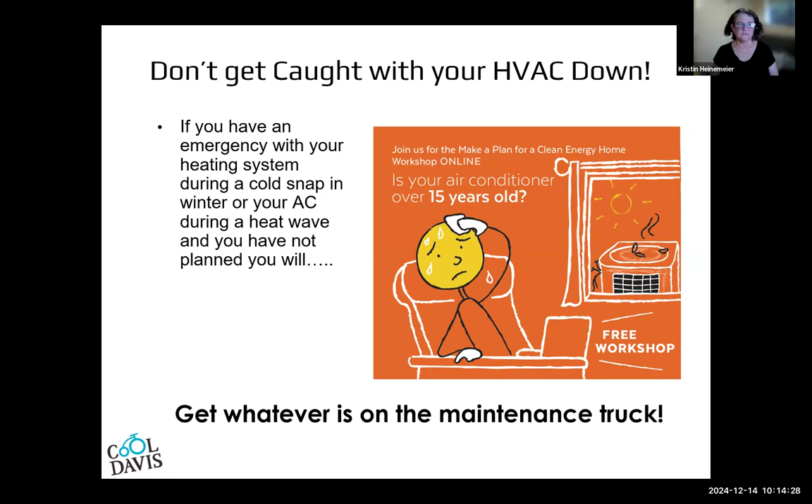So that's really the motivation behind making a plan. And so the question you've got to ask yourself is, do you feel lucky? Do you think your system's going to last a bit longer? How confident are you of that? One of the ways to assess whether you're going to be lucky is, how old is your system?

If it's a pretty new system and it seems to be working okay, then your plan for that will be quite a few years out. But if it's an older system, you might need to start looking at it. Many people don't know how old their system is, so one of the things Cool Davis offers is we can generate a report of all the permits that your home has ever had - it'll tell you what kind of permit it was and who the contractor was.

So you've got your report, you know how old your systems are. Now you want to start thinking about what do I do? Where do you start? Do some energy sleuthing.

This is Chrissy Backman, one of our original energy consultants or coordinators for Cool Davis. She's checking out her meter. This is kind of an old school way of checking your energy use. It can be useful. Some meters now, I'm not sure you even have access to that, but that's one option. Another thing is to check out a watt meter from the library, or Cool Davis has watt meters you can borrow.

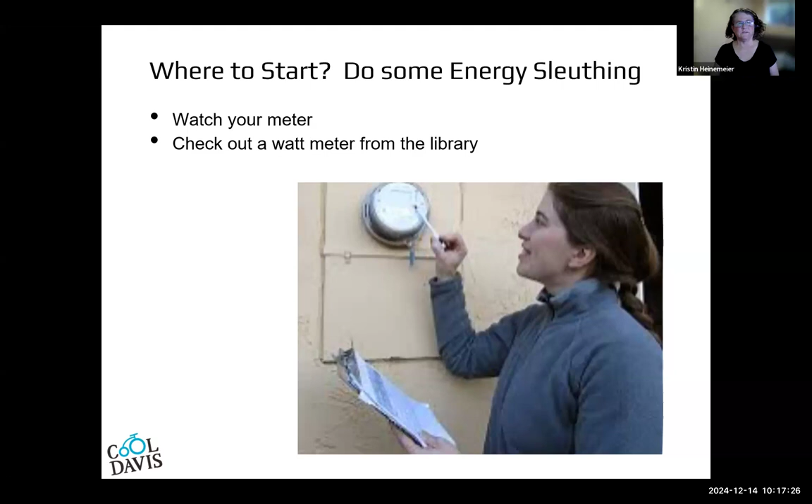My other son used it to check in on his roommates, because the energy bills seemed really high. He went into their rooms and checked out their computers, and some of them had a space heater, so he could tell them, aha, I want you to change your ways. It's a really helpful thing, often having that watt meter.

Another thing Chrissy did, maybe a little more up to date, is she downloaded a copy of all her energy use. Anyone can do this. If you have a PG&E account, you click on 'my energy use' or something like that, and you'll see something that looks like this green button here. Most people around the country have access to this. It's a really handy way of getting quick access, and if you're handy with a spreadsheet, you can graph it and see what's going on.

What Chrissy found was that every weekend her energy use was high, and she thought, oh my God, I've got to do something about this. She said, my kids are home on the weekends, they're using their gaming systems, that's the culprit. I'm going to tell them to change their ways and we're going to fix this problem.

So this was her old data, and this is when she started looking at it and found out there was this weekly problem. She told her kids they couldn't use their systems on the weekend, we're going to cut that out. But it didn't reduce it by very much, so she had to keep looking to see what it was.

Lo and behold, she found it was her laundry—Sunday is laundry day. Washing machines use a fair amount of energy, but electric dryers use a ton of energy. So one of the things she did was start line drying her laundry, and there's a video on line drying laundry you can check out.

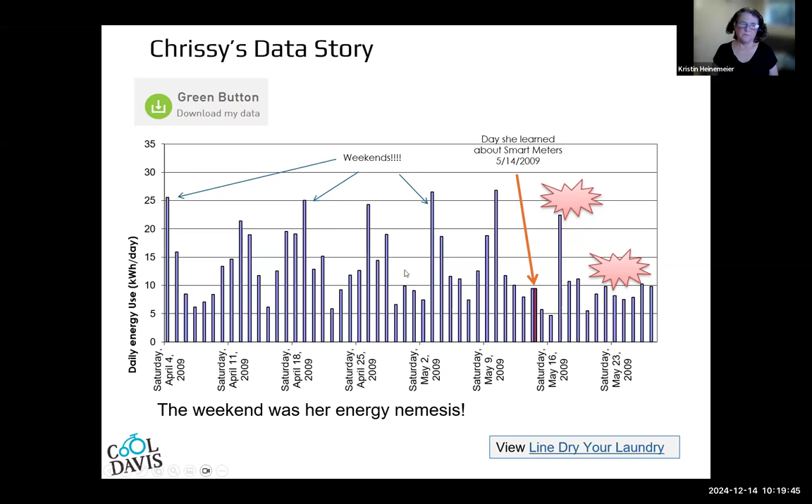So kind of play with it—you can get a sense of where you're using energy by looking at that data. There are also online resources from PG&E and Valley Clean Energy you can take a look at.

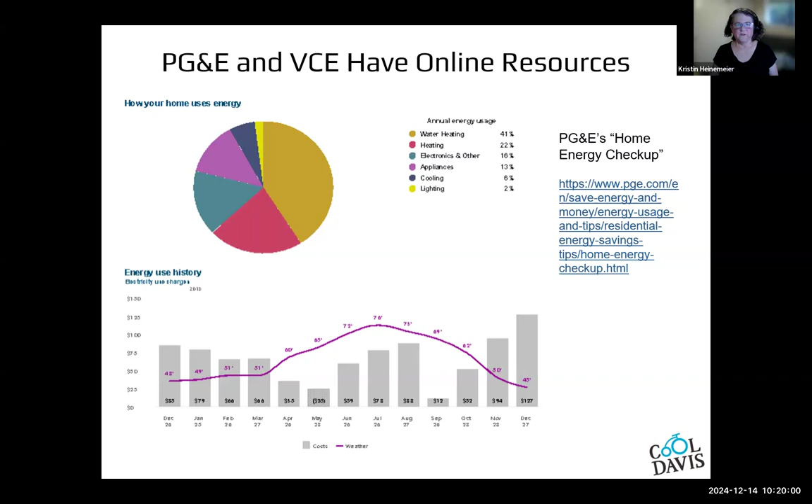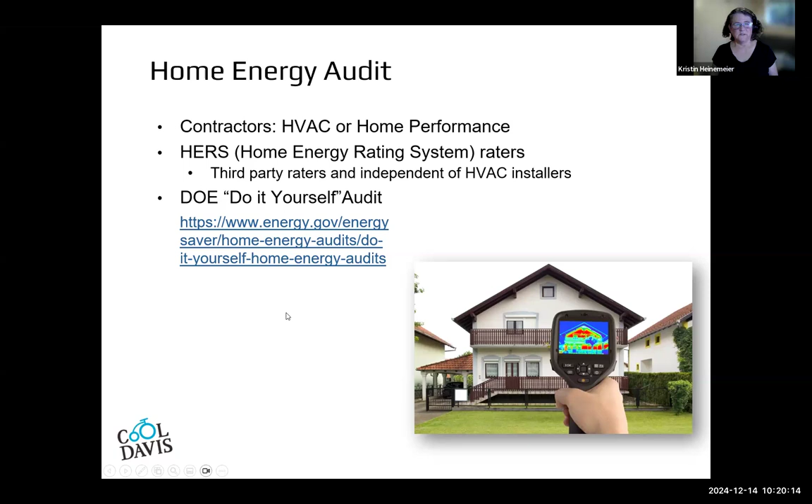Valley Clean Energy has hotlines and advice lines that can help you figure things out, so check those out. Get a home energy audit. Many contractors, HVAC contractors or home performance contractors can provide an audit for you. The DOE has a do-it-yourself audit, so check that out.

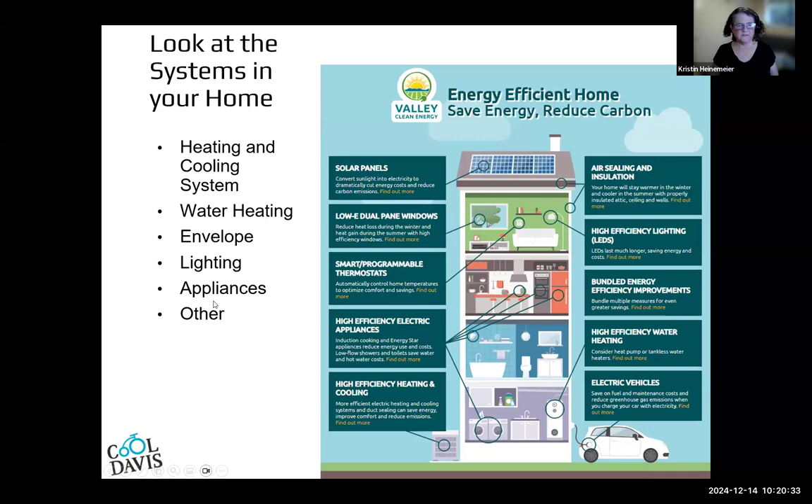There are a lot of different ways of getting information about the energy use in your home. Start looking at the different systems, and Valley Clean Energy has great resources linked on their website. Look at your heating and cooling system, water heating, envelope, lighting, and appliances. I'll talk about all of that. Cool Davis has an Understanding My Home Energy worksheet you can download to help you methodically look at all of this.

So where do you start? Now that you know what end uses might need attention, the way we always told people to do it in the past was this inverted pyramid: you start with behavior, reducing all your loads, getting things as small as possible, then you're able to right-size your HVAC system to make it as small as possible. Once everything is as low as possible, then you put PV on your home, and that rooftop solar system will be as small as it can possibly be and least expensive. That makes all kinds of sense.

But in the real world, sometimes you'll find there's a great deal on solar. That's what happened with me. There was a 0 interest loan available, and I said, hey, this is a great time to do solar. I hadn't done some of the other stuff, but I talked to my solar contractor and said, I'm planning on replacing my windows pretty soon, so take that into account. My HVAC system will need to be replaced at some point too, so you can kind of anticipate some of these things.

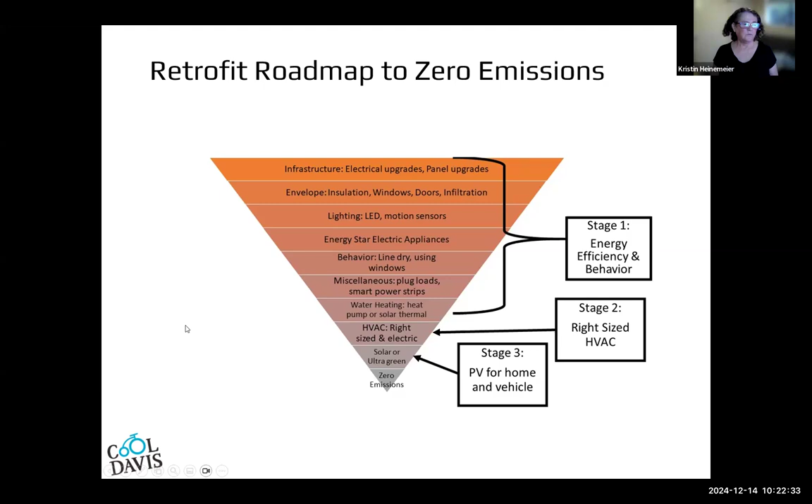You don't have to necessarily do it in this order, but that's what making a plan is all about. If you tell your solar contractor you're going to put in an EV charger and a heat pump, they'll have to make the system a little bit bigger, even though you haven't installed those yet. However you want to phase these things in, making a plan will help you make sure things can be as small as possible.

Appliances and lighting are always a good place to start. Look at all the end uses in your home and see which ones you can replace. Replace all your light bulbs with LEDs—there's no reason not to do that right now, LEDs are great. Look at some of your other appliances too; maybe they're not needing replacement yet, but they could be replaced sometime soon.

Water heating is a big one. This is another end use where if it fails, you are out of luck. It's very unpleasant when your water heater goes out and you find the one you really want has a lead time of a month. You're not going to wait a month—you're just going to take whatever you can get. So consider early replacement on water heating, particularly.

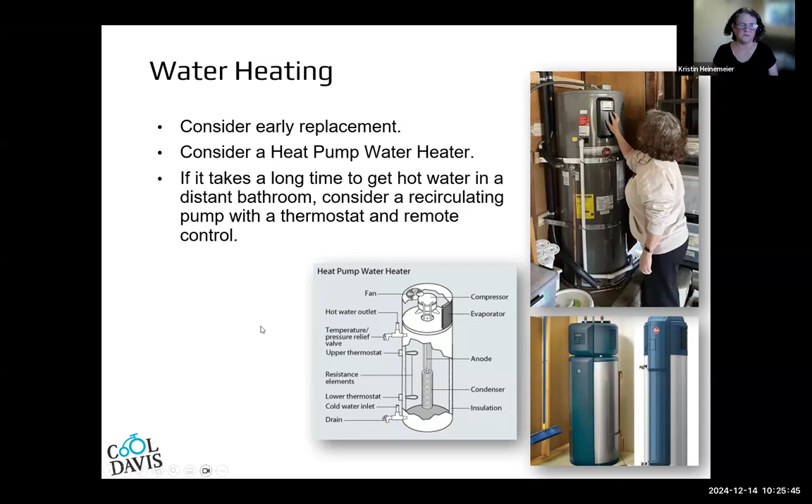The envelope of your home is another great place to look at. That's basically the whole shell of your home—the roof, the ceilings, the walls, the floor—any place where air or heat could be leaking in or out. You want to pay attention to that.

Sealing air leaks is a great place to start. You can take an incense stick and go around your windows, doors, and outlets, seeing if anywhere air is going in or out—that tells you you're leaking a lot of energy into the atmosphere. Or you can call a contractor and they'll do something called a blower door test, where they pressurize your whole house, making it really easy to see where those leaks are.

Wall insulation is one of those things that's really hard to address once your home has been built. There are times, like if you're replacing windows, that might be a good time to remove some siding and address the insulation, but it's kind of tough.

Attic insulation is something you can address because it's right up there in the attic. Poke your head up there and see what it looks like—you should have a good amount of insulation, pretty evenly distributed. If possible, you can bury your ductwork to make it even more cozy in your house. But attic insulation is definitely worth paying attention to.

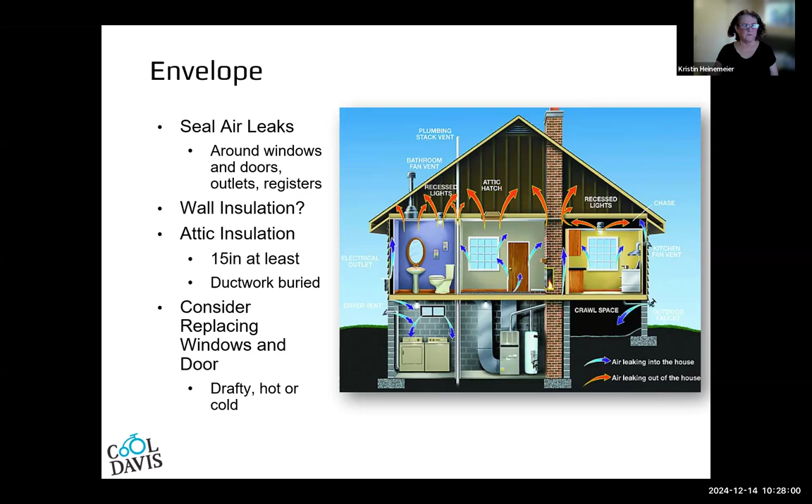There are cool coils in the air handling unit, cooling off air. The air goes through these ducts throughout the house, then the hot air goes back into the air handling unit. It's all recycled. Many people aren't aware that you're not getting any fresh air. Most homes have enough leaks so you're not going to suffocate, but a normal air conditioning or heating system does not provide any fresh air. Just be aware of that.

So it's all going in a circle around and around, and the heat accumulates in the air handling unit, in the coils, and then it's pumped out through the condensing unit, or the compressor pumps all that heat out into the atmosphere. That's how most systems work.

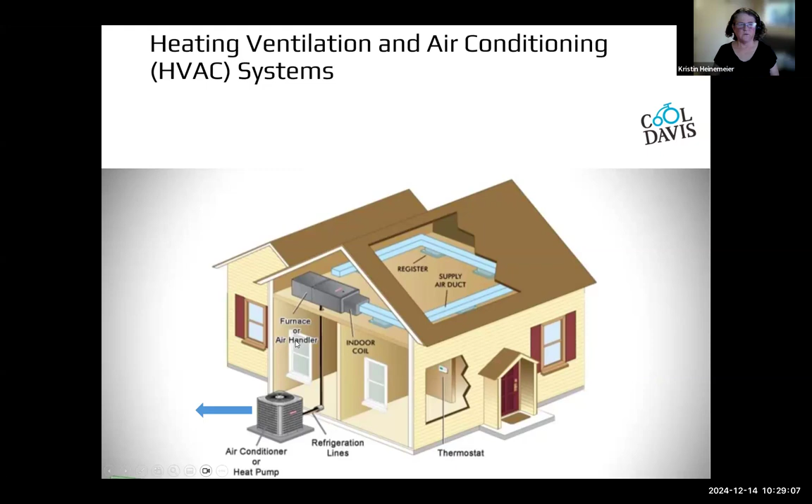So let's look at some of the components. Ductwork is something that really pays to look at closely. Most ducts really leak a lot—people are just amazed when they find out how much most ducts leak. And it's not that hard to address that.

I like to say it's like driving a Prius with a leaking fuel line. You can be all proud of yourself—you got this great, efficient car, but then you're just not getting the fuel economy you expected. Well, that's because it's all leaking away.

Anytime you're doing a repair or replacement on your HVAC system, talk to your contractor about addressing the ducts. My pastor had added a room onto his home and was going to have to get a whole system to condition that one room. But fortunately, he called a good contractor who looked closely at the ducts and said, if we fix the ducts in the rest of your house, you've got plenty of capacity. You don't need to add a new system or put in a bigger one. So sometimes just dealing with the ducts can be all you really need. That's kind of cool.

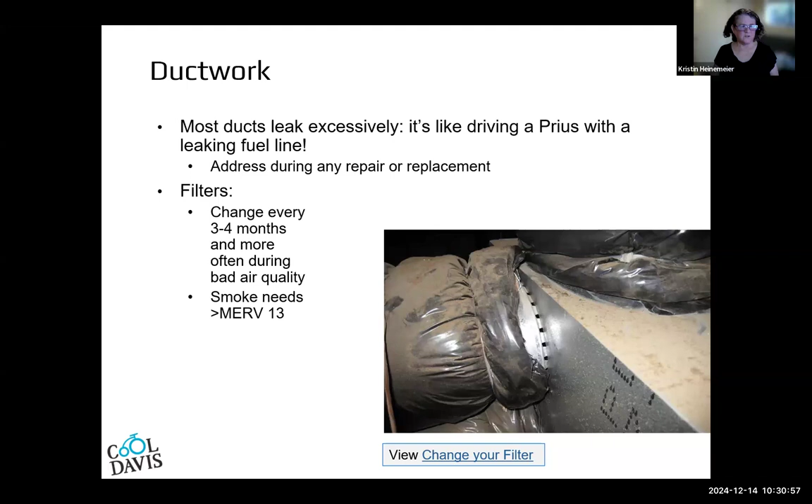Something you can do at any time is replace your filters. Replace them as often as needed. On really smoky days, you can temporarily put in a MERV 13 filter that filters out a lot of the smell of smoke. I find a MERV 13 is a little too constricting for everyday use, so I just put them in when it's real smoky. Play with it and see what works for you. We've got a video on how and when to change your filter.

I should probably start with this because it's one of the most important things people in Davis can do to reduce their energy bills. We are the luckiest people in the world because we have the delta breezes. If you look at the difference between day and nighttime temperature, that's one of the biggest differences of anywhere in the world. That's because the cool delta breeze comes off the ocean and flows into the valley right about where we are. Even on hot days, we can reliably count on cool nights.

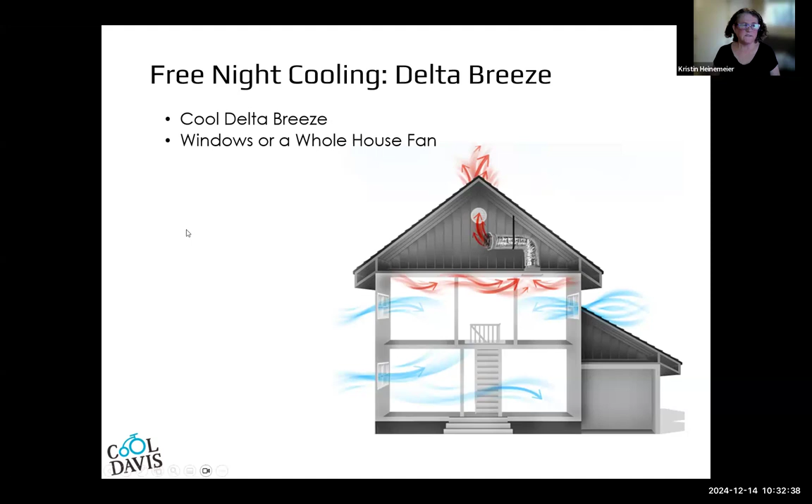You don't even really need a whole house fan. One thing I do is open my windows and put a box fan in one window going in, and one on the other side going out, so I picture this sort of wind tunnel going through my house. As soon as I wake up in the morning, I close everything off, and it's just a great solution. It doesn't have to be expensive. We've got a video on how to do that.

Look at your thermostat settings. One thing I really want to tell people is put your fan on auto, not on. Some people think, oh, I want fresh air, but remember, you're not getting fresh air with your system—the fan only recirculates air through the house, and you don't want to do that when it's not needed. So have it set on auto.

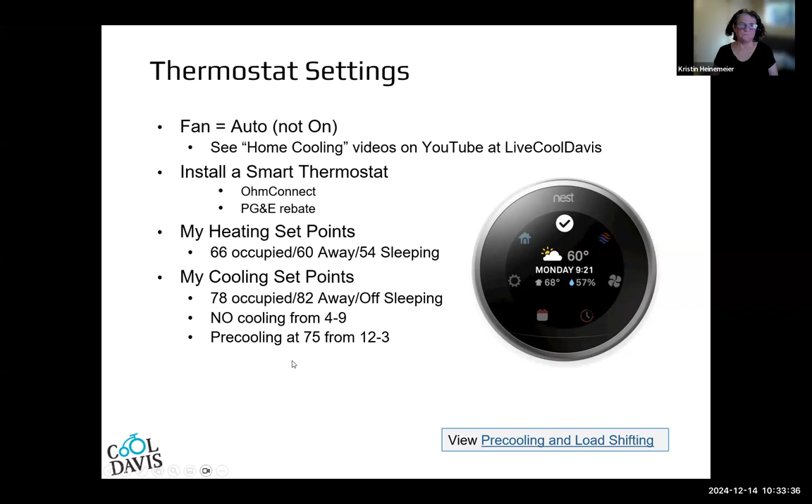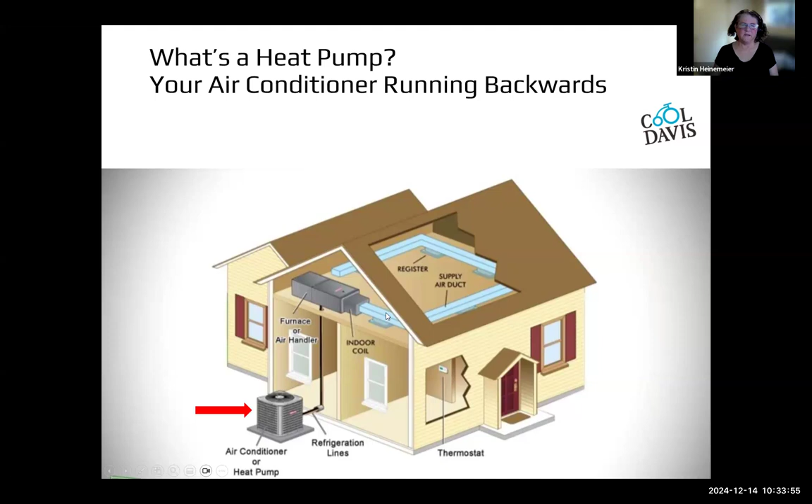The final thing I want to talk about is what a heat pump is. A heat pump is essentially your air conditioner running backwards—we pump the heat out of the house. Well, we can do the same thing in reverse and pump the heat into the house. Just as simple as it sounds: you run your air conditioner backwards. How does that work? It's kind of like water—it wants to go from high to low. If you want water that's low to be high, you have to pump it up.

You have to take some energy to pump it up there. Same thing with heat. Heat always flows from hot to cold. That's just a law of physics. If you want it to go from cold to hot, you have to pump it, just like with water.

So what that means is in the summer, when you want heat to go from your house to the outside, it's not going to do that on its own because it's hot outside. So you have to pump it. And the same thing in the winter. You have to pump the heat if you want to gather it from outside and pump it to the inside. It's hard to believe when it's 0 degrees out, but there is some heat out there. So a heat pump can just pump it backwards.

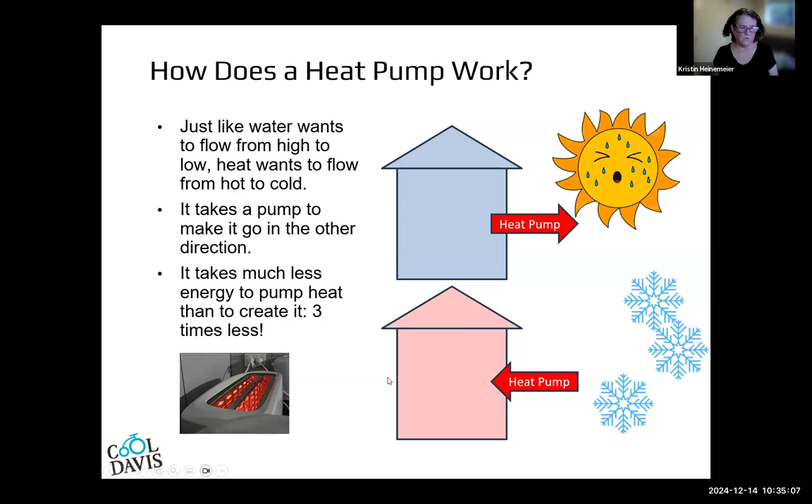It takes 3 times less energy to pump heat than it does to create it. Normally with a furnace, you've got something like a toaster here, an electric resistance, or you've got a burner where you're actually burning fossil fuels. So creating heat takes 3 times more energy than just pumping it.

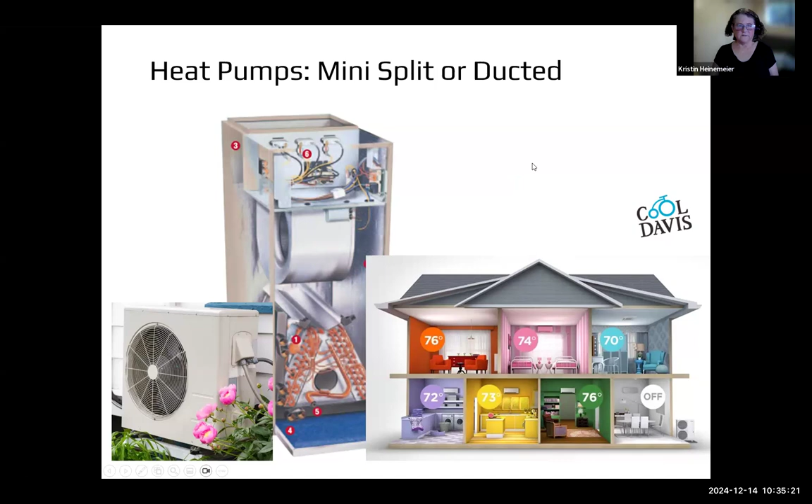A heat pump can be just like your air conditioner, a split system, or it could be something called a mini split, where every room can have a different temperature. It's kind of a neat solution.

I'm going to go through the rest of these a little bit quickly. So the first thing you want to do is work with a contractor. Find a good contractor that you're comfortable with now, and then you can start making your plan. Shop around, make sure it's someone that you're comfortable with.

When it does come time to select a bid, contractors aren't psychic. They can't tell what you want. You're going to have to tell them, I want something really efficient, I want a heat pump, whatever it is. Be sure that they know what you want.

Two things I want to say that I think are very specific: bigger is not better. If you have a really big system that's constantly turning on and off in order to not overheat or overcool you, that's very inefficient and very uncomfortable. Half the time you're uncomfortable. So a good contractor will do load calculations and make sure you're getting just the right size.

A good contractor also will get a permit. It's amazing how many contractors don't do that. That's required by law, and in order to do a lot of the things that are required, you really have to have a permit so that the city can be tracking what's going on. We have a working with contractors worksheet and a contractor bid comparison. So check those resources out.

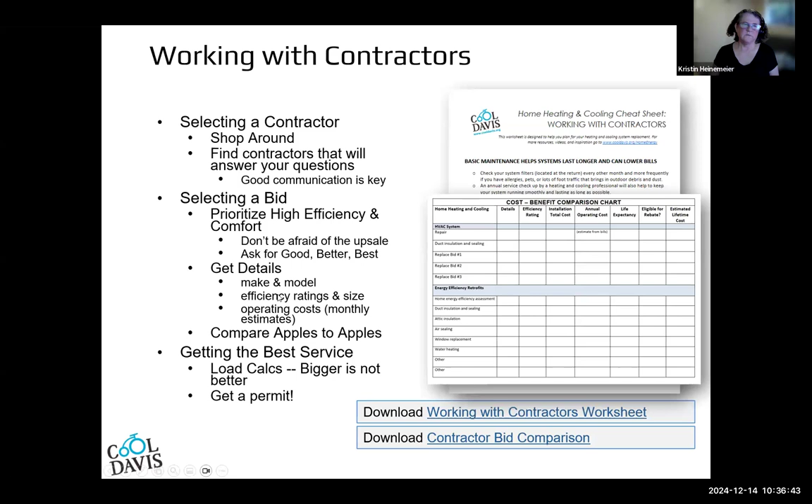Get the best price that you can. Contractors are constantly having sales and special deals where they'll bundle things in different ways. There's tax credits that come and go, rebates that come and go, and look into stacking, which means you can combine a lot of these things. Sometimes you worry, oh, if I take the tax credit, maybe I'm not eligible for that sale or rebate, but for the most part, you can stack those things.

Consider life cycle cost. If there's a sticker shock, things like solar or heat pumps sometimes can be pretty pricey, but they're going to pay for themselves over time for the most part. So consider, it might be more expensive to start, but it's going to save money over time. It might still be a really good deal, even if it seems pretty pricey.

Before I wrap up, I want to just say a couple of words about electrification, because I know that's a hot topic that a lot of people are thinking about. It basically means replacing combustion appliances with electric ones. Pretty simple. So look through your house, look for all of the combustion appliances - you've got furnace, water heater, dryer. All 3 of those can be replaced with a heat pump.

You're very, very efficient, totally electric end use. Your cooktop, I already talked about. Your car, didn't really mention, but you should certainly consider replacing your fuel-fired car with an EV, electric vehicle. These end uses can be much more efficient. They don't use fossil fuels. Electricity can be produced without burning fossil fuels.

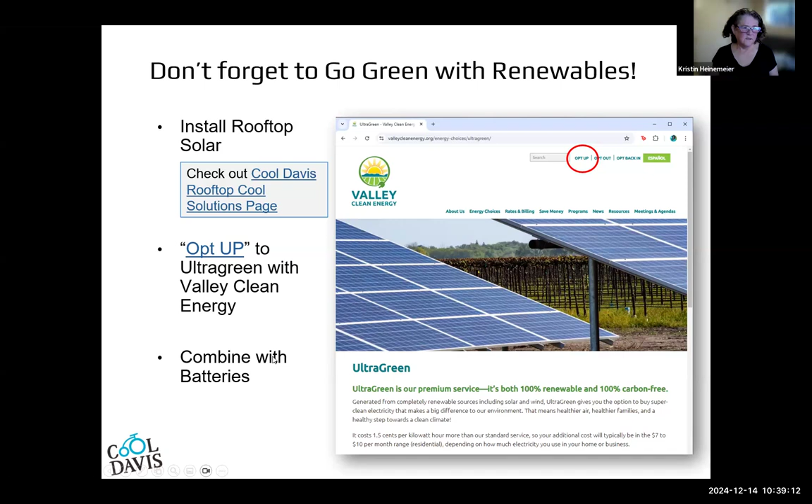A bit of a spoiler, I want to tell you that your next replacement will probably be electric. Even if you're not planning for it right now, just take my word for it. There's a lot of policy things, including Davis's Climate Action Adaptation Plan, that are leading towards electric. That is the way things are going in the future. And so I'm pretty confident that your next replacement will be electric. So you're going to have to plan for your electrical panel to have enough capacity to put all this. So yet again, making a plan is really, really critical.

So wrapping up, good luck on your clean home journey. It is a journey. You're going to be starting off in a panic, and then you're going to watch HGTV and say, oh, this is great. You know, this old house, I'm going to do this. Is going to be awesome. Then you have trouble finding a contractor, and you find one you're happy with, and then it's looking expensive, but then you find rebates. It's constantly up and down, but be confident that you're heading in the right direction.

You are on the right path, and talk to other people who are doing the same thing. And you're going to find that we're all in this together, and we can help each other through this. So good luck on that. And I will wrap it up there.

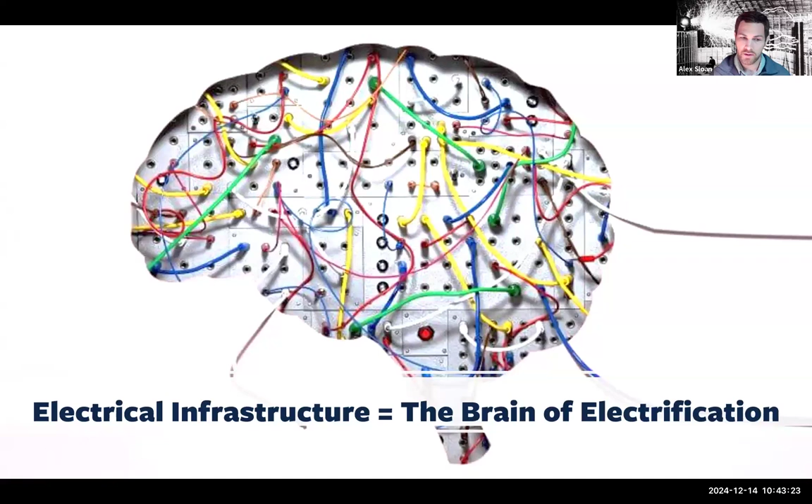So electrical infrastructure is the brain. Heat pumps are the heart of electrification.

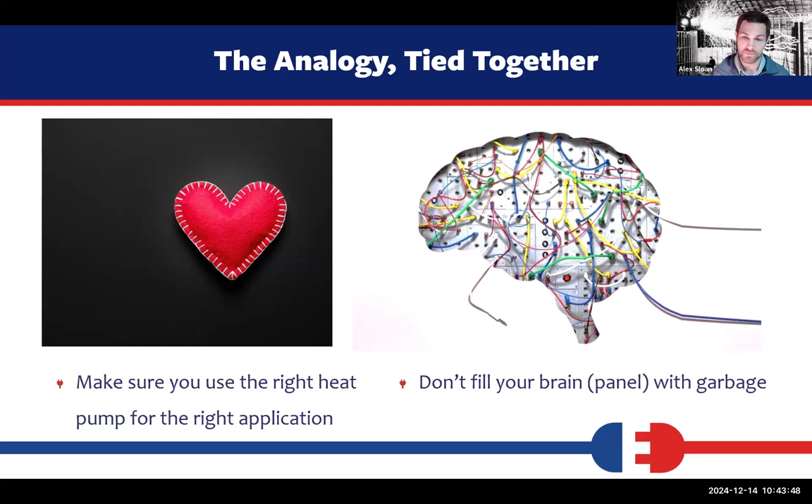We want to make sure the right heat pump is in your house for the right application, and do a load calc, all the things Kristin just mentioned. Also, we don't want to fill our brains with garbage, so we don't want to load a whole bunch of circuits into our panels that are unnecessary. That's where making this plan all starts.

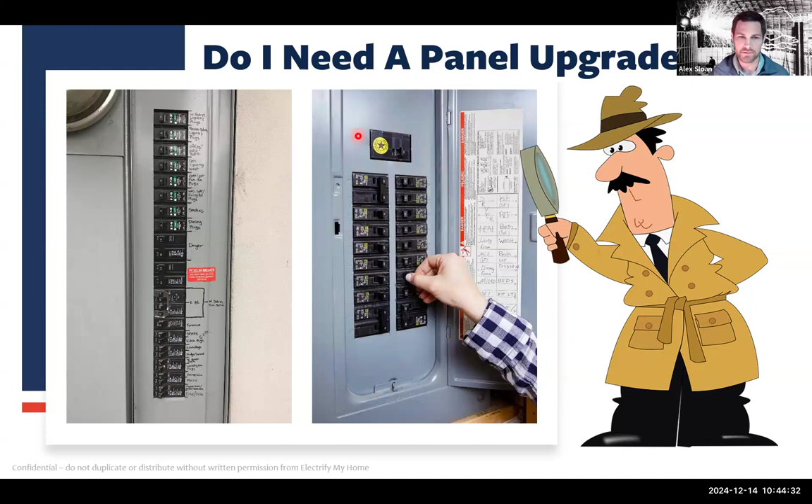A question we get from so many customers: do I need a panel upgrade? Most of the time it's very much an 'it depends' question. It depends how many gas appliances you have left in your house, what your main panel capacity is. There are a lot of questions that go into this. But if you pick a good partner, it's really easy to map out a journey. We're looking at pictures of two electrical panels here, and they look pretty darn full, but having no breaker space left is very different than having no electrical capacity left at the top.

Which brings me to my next slide: a full panel is not the same as no remaining electrical capacity. A 100 amp panel has 24,000 watts; 200 amp has twice that amount. Where it gets tricky is that we need to meet National Electrical Code guidelines, so this isn't always all available all the time. We need to be very conservative with our calculations. But trust us when we say there's a whole bunch of capacity out there, even on small 100 amp panels.

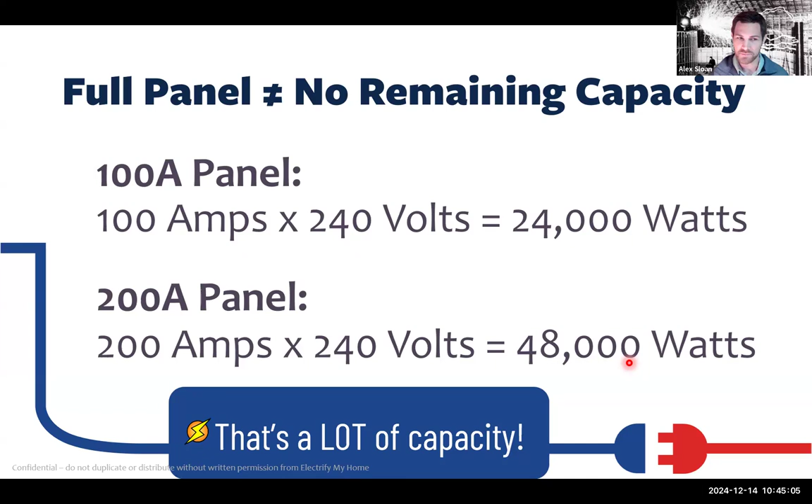So why are we talking about this? What's wrong with just going through and upgrading your panel? A couple notes here, and I'll take a quick aside: we have a whole 1.5 to 2 hour webinar on this particular subject, so I'm kind of cramming a lot of information in here. Feel free to add any questions to the Q&A or contact me after. We're happy to clarify.

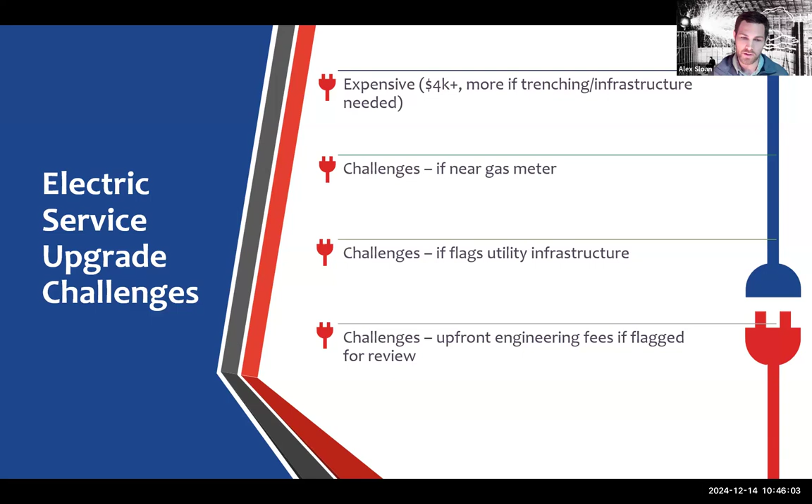Electrical service panel upgrade challenges: they're very expensive. It gets very complicated if you need to trench or add extra infrastructure from the utility. If your electrical panel is near a gas meter, utilities don't like that, and we can flag utility infrastructure and upfront engineering fees if it's flagged for review. So if the utility needs to upgrade a transformer on your block because you're the last one to upgrade to 200 amps, that burden could lie on you as a customer. We want to try to help you avoid that if possible.

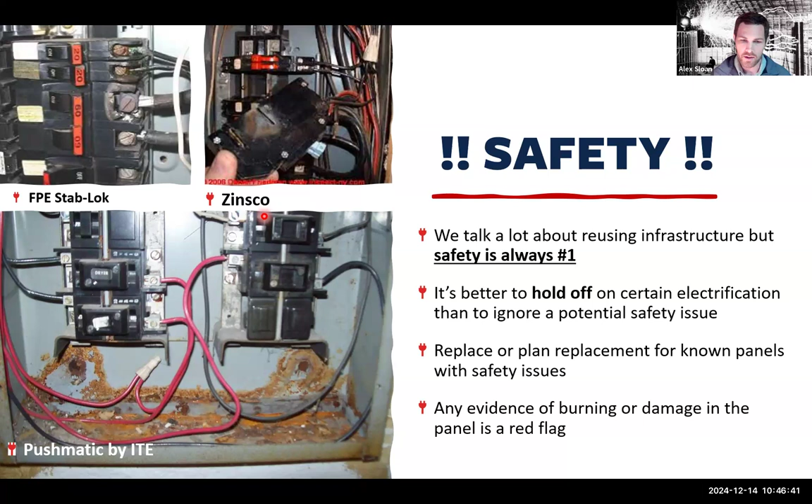One caveat to all this is that safety is always a priority. Sometimes going through and spending the money on a panel upgrade from the start is going to be really important, especially if we have an old and worn out panel type. Some of the notorious ones with potential safety concerns are listed on the screen here. We won't find a whole bunch of Stab-Lok and pushmatics in this area, but there are certainly a number of Zinscos. Zinsco panels can continue to operate, but we want to inspect them regularly to make sure there's no signs of burning or scarring or red flags.

Next, I'm going to talk about ways to stretch your panel capacity without having to upgrade your panel from the start, and then I'll show a quick case study at the end. We like to call this watt dieting. We have several different choices we can make with respect to the appliances we put in our home. The earlier in the process we can talk about and plan out your panel, the better. If you've already added your solar and almost all the appliances in your house, and then you want to add something, it's a little harder to plan for, but we still have some tricks.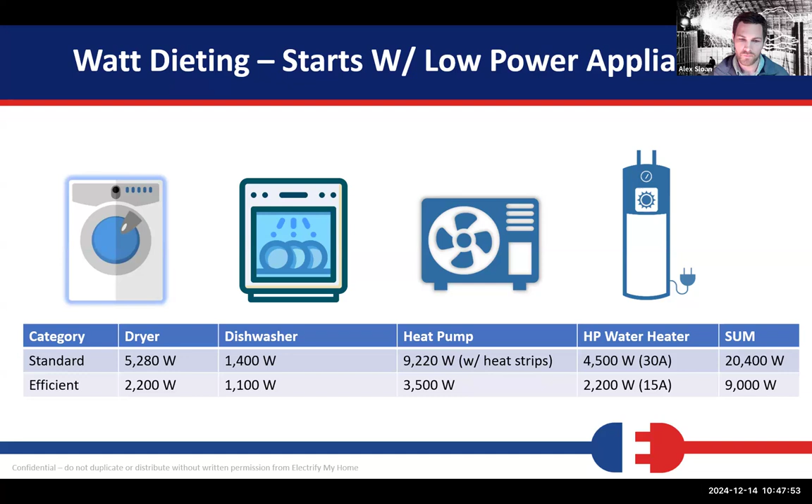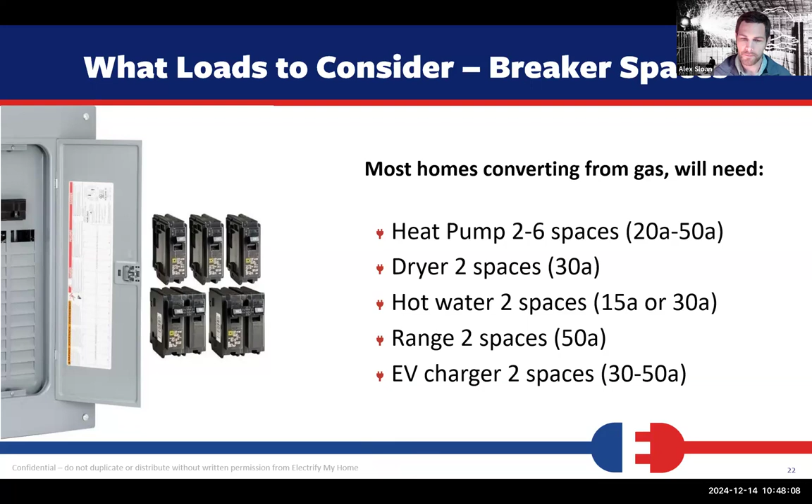And then a few different scenarios, right? So let's just take an example of the panel I showed earlier, and we want to add a heat pump water heater circuit. They're typically 240 volt, 30 amp circuits, so they do require some space in the panel.

Option one, if your panel has sufficient capacity, we can add a special type of quad breaker, what we call quad it out, right? So we get two 240 volt circuits into a small space in the full panel.

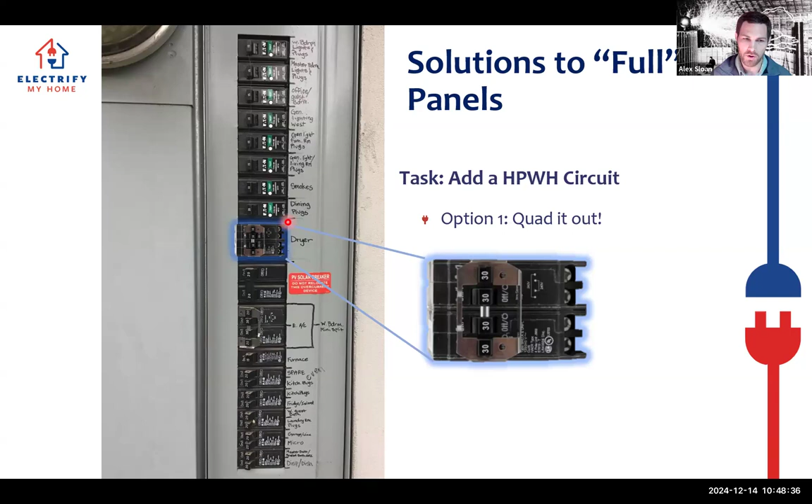Option two, we can add this thing called a circuit splitter. A circuit splitter allows you to share one circuit between two 240 volt appliances. So we might have the dryer here on one leg and the heat pump water heater on another leg. We need to be mindful of what appliances we're doing this with, but it's a really great solution, especially for EV chargers.

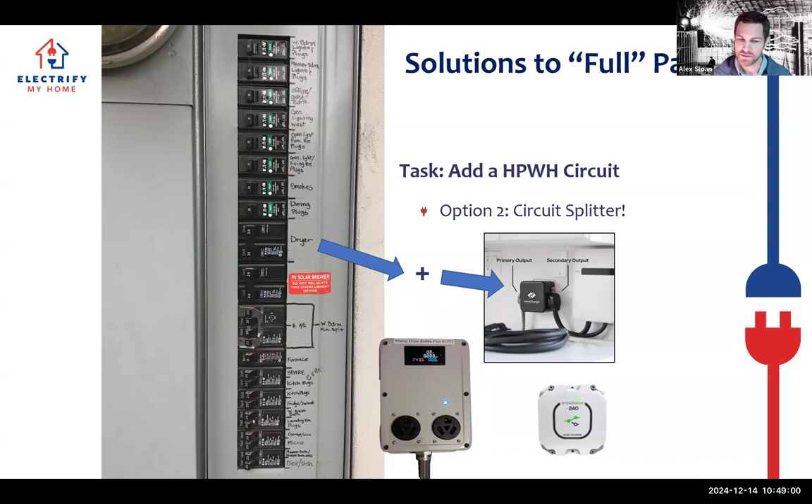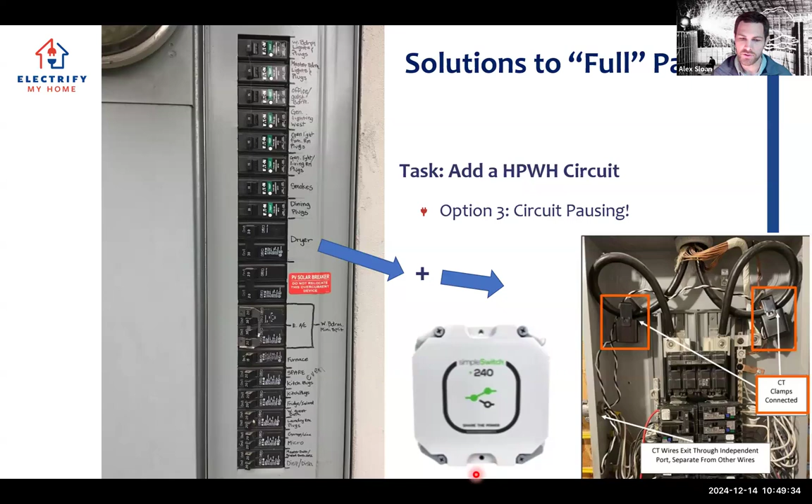Another one that's very similar is circuit pausing, right? So instead of sharing a circuit between two different 240-volt appliances, we monitor the capacity running through your main panel. If the panel ever gets above 80% of its available capacity, this switch won't allow that circuit to work. So it's kind of a fail-safe. You could potentially put your new EV charger, heat pump water heater, you name it, on one of these circuit pausing devices.

Another option, again if we have capacity, which we'll figure out by doing an electrical load calc, we can just add a sub panel, giving you a lot more space to work with.

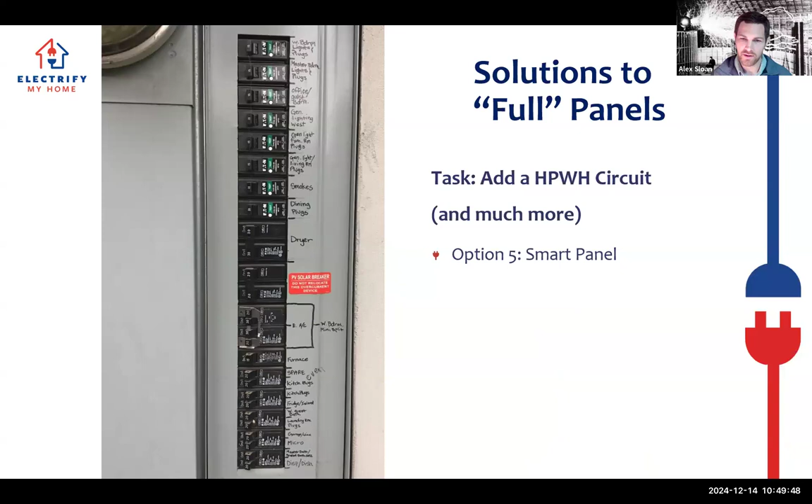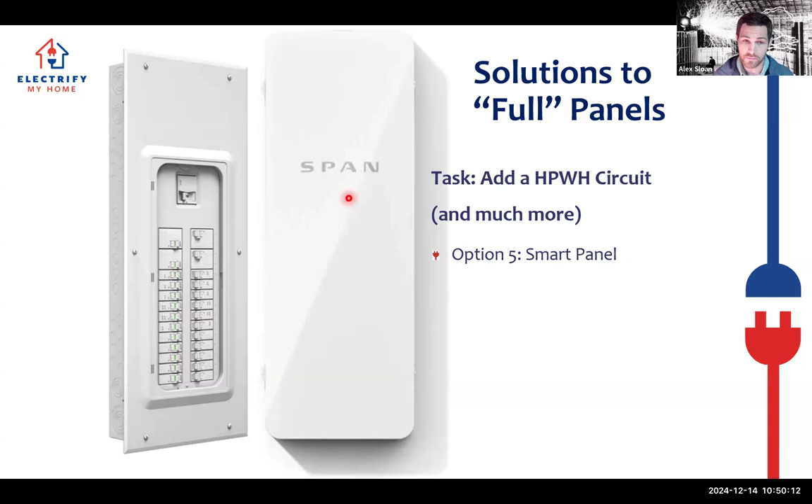Two more options. Another is to add a smart panel. In the case study I'll show, there's an example of this. A smart panel, some of these have integrated features that will intelligently throttle your uses throughout the house to ensure you're never going to go into the danger zone above the allotted capacity available. Smart panels are really cool, we like putting in these span panels.

And then the last option, consider a 120-volt option. So instead of putting in a 30 amp 240-volt appliance that's very power hungry, we can use a 120-volt shared circuit model that's very light on your panel.

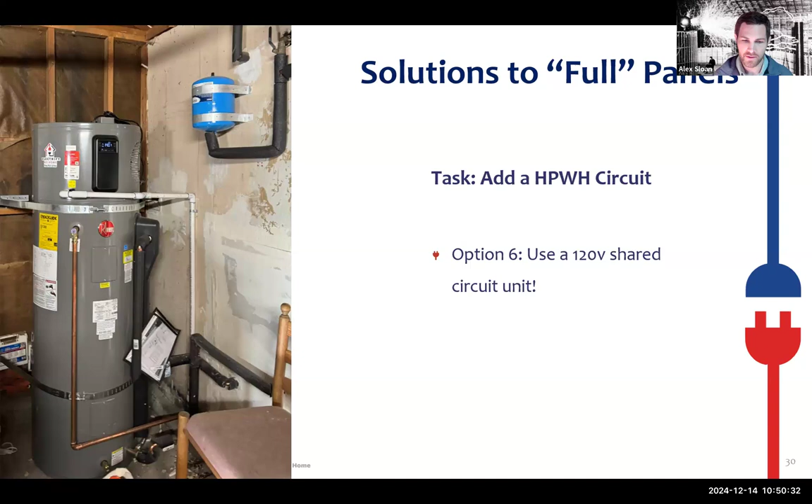So rush through that. I know there's a whole lot there, but I'm going to go ahead and switch over to a case study of a house in Davis where we rolled out a lot of these features to help them stay under 100 amps. I'll go ahead and roll that forward.

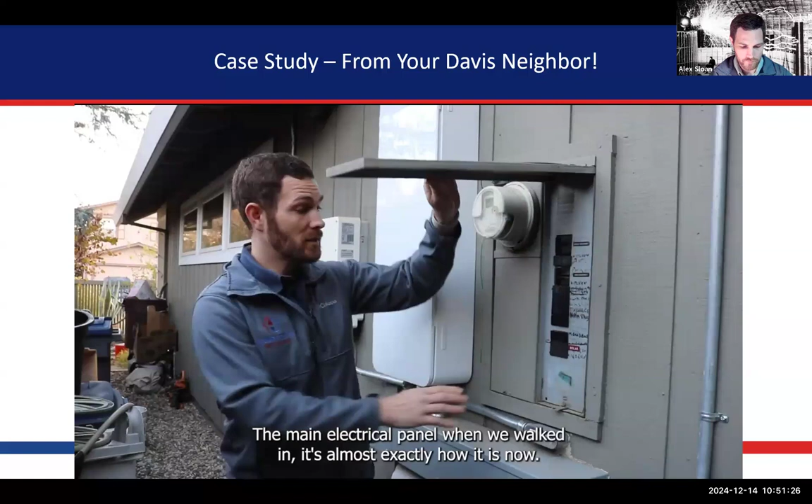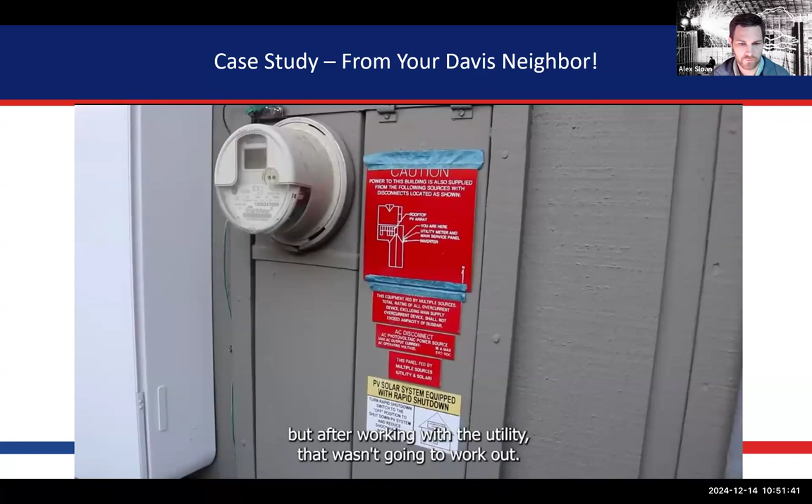Okay, so this was the original main electrical panel for the house. When we walked in, it's almost exactly how it is now, 100 amps of available service from the utility. We actually came in and thought we might be able to bump that up to 125 amps, but after working with the utility, that wasn't going to work out. The other challenge from a utility perspective is that there was a gas meter sitting right here next to the panel, which is a no-no from a utility panel upgrade perspective. So several challenges, right?

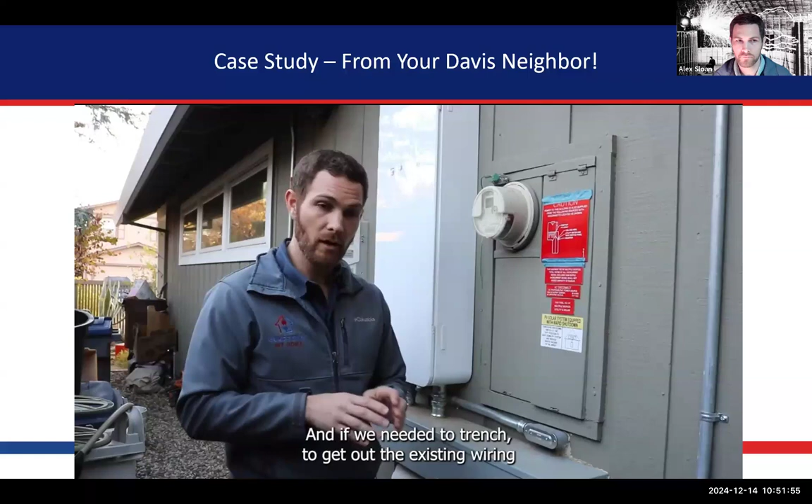And if we needed to trench to get out the existing wiring and upgrade it to hold 200 amps, which is the current standard, that would be extremely costly. So what did we do instead? Instead of going through the utility upgrade process for a panel, we went ahead and made some important and strategic decisions with respect to what electric appliances we spec'd for the project, as well as putting in this Span smart panel.

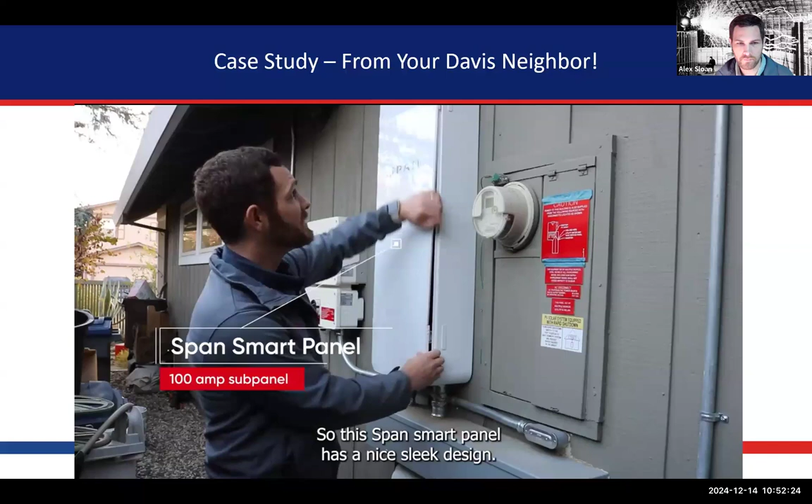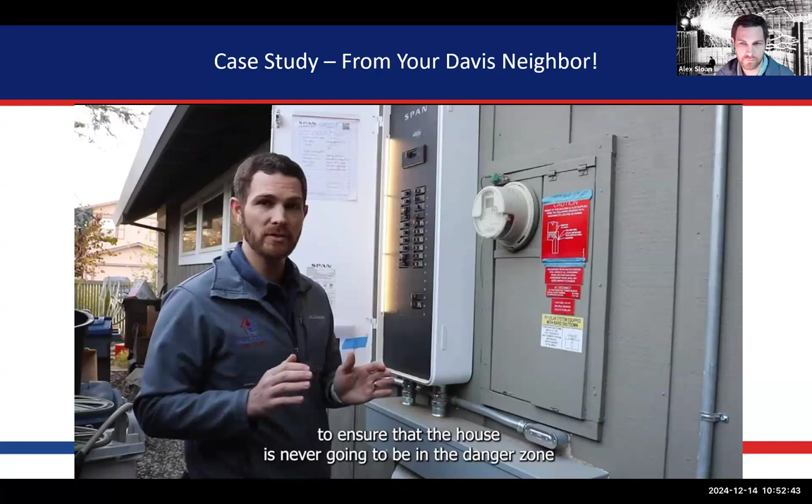So this Span smart panel has a nice sleek design. This is the panel of the future. It is a smart panel. It's going to intelligently assess if your house is ever getting up near 100 amps or whatever you set it to, and from there it will strategically shed certain loads that the customer picks to ensure that the house is never going to be in the danger zone with respect to available capacity on the panel.

We've got our Mitsubishi inverter heat pump. When we're playing the Watt diet, it's really important to prescribe equipment that's going to be as power efficient as possible. This unit is a 24,000 BTU unit. We know that's the size because we did a thermal load calc. We don't guess on this stuff.

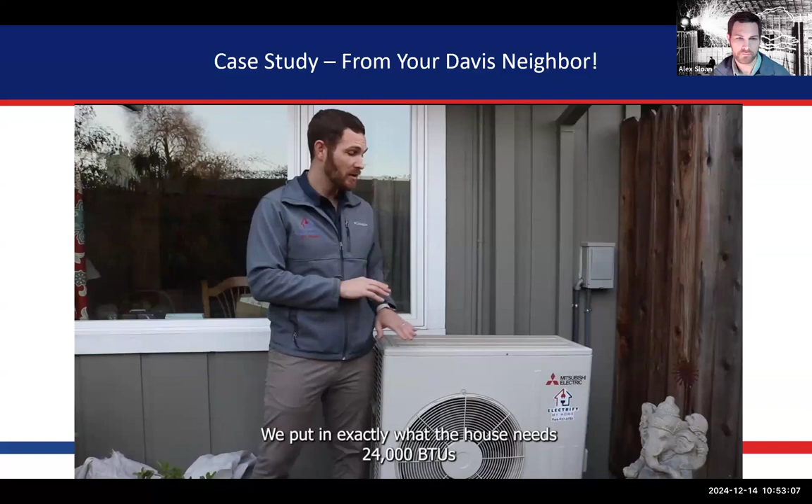We put in exactly what the house needs: 24,000 BTUs, which only requires a 20 amp breaker. So in addition to not taking up much room in the panel from a capacity perspective, it's going to optimize the customer's energy bills for as long as the system's in the house.

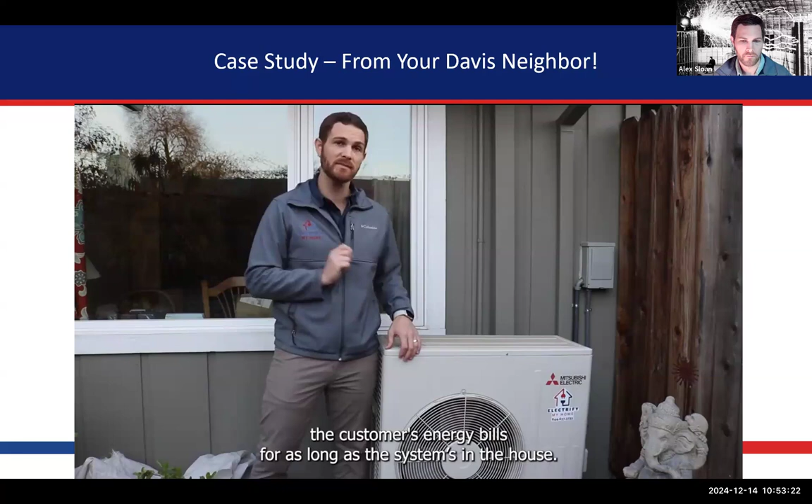All right, here we are at the indoor unit for the HVAC system. This is the Mitsubishi multi-position air handler. The outdoor unit powers the indoor unit, so there's no separate circuit required for the air handler.

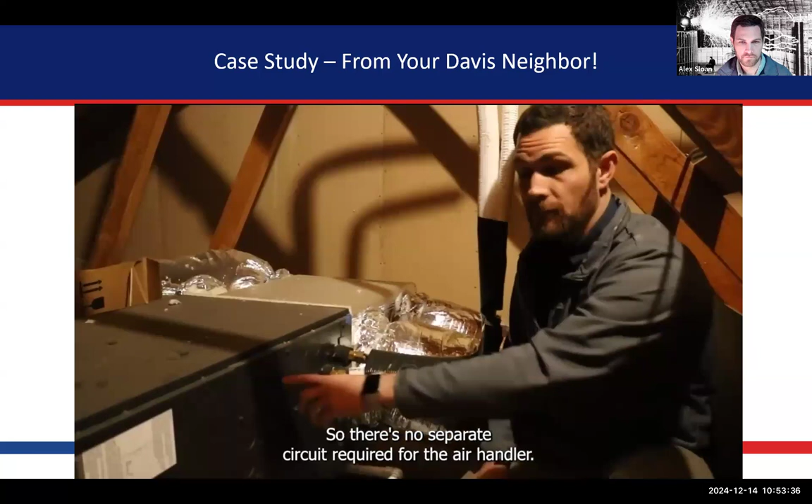Here we are at the induction range. Induction ranges can be fairly power intensive. This requires a 50 amp circuit. We have a Frigidaire model, beautiful, works great, and has the controls up here in the back. Lots of great features on this particular unit.

The 120 volt heat pump water heaters have just a heat pump mode, compared to the traditional 240 volt models, which have a heat pump in addition to a couple of electric resistance elements to boost up and speed up the recovery. In this case, we wanted to be as power efficient as possible and found that the traditional 240 volt unit just wasn't necessary.

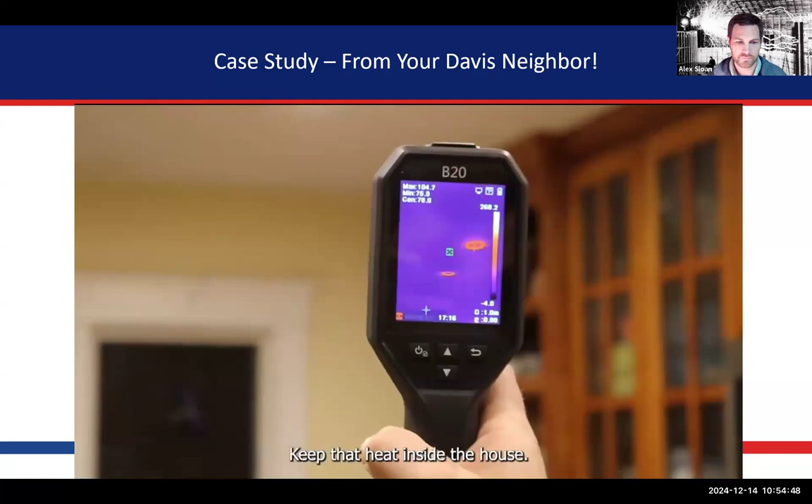One of the most underrated features of a Watt Diet plan is attic insulation. It's so simple, we just got to do it. By installing attic insulation and bringing it up to code, as well as burying the existing ductwork in attic insulation, which is important in a dry climate, we were able to downsize this HVAC system capacity from 3 tons to 2 tons, alleviating a ton of panel capacity. That's the nice thing about insulation, it keeps the house nice and evenly tempered throughout. Keep that heat inside the house, don't let it escape to the attic.

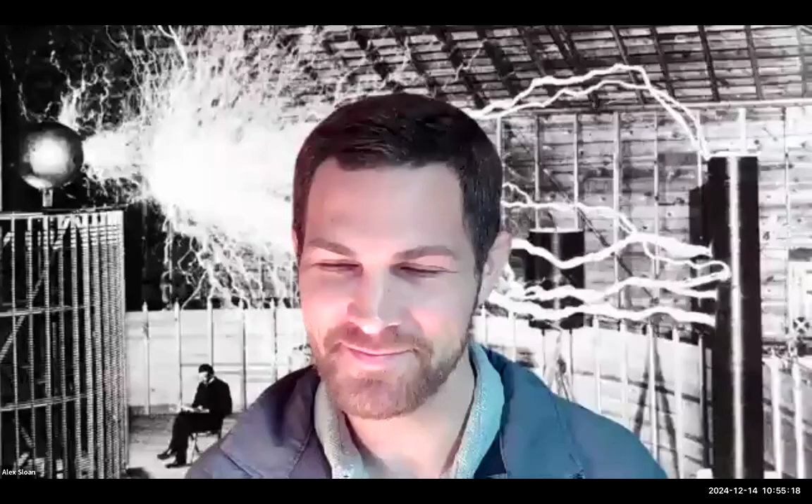Thanks, Danny. Thanks, Alex. I liked seeing the IR camera and looking at the heat leaking out through the recessed can lights. You can see what that is, one leaky spot. Next, we have Danny, he's with Greiner Heating and Air, and he's going to talk to us about the rebates and incentives that are available now for heat pumps and electrification.

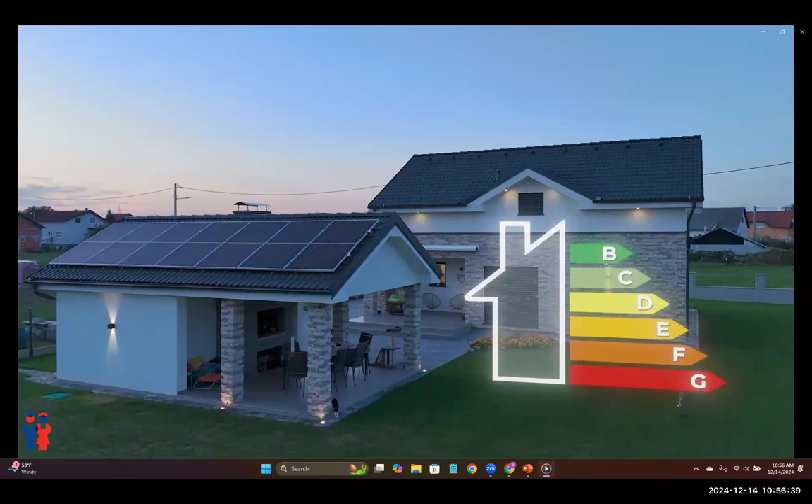And from what I know, Jacob, the Energy Star rated, that's the good stuff that people would want anyway. They make it pretty easy. Who doesn't want the Energy Star rated good stuff? Absolutely. Right, it generally means it costs you less to run, right? That's it, yeah, let's be fair. That's what we're all looking for. Save a few dollars. Yeah.

So tell us about these rebates, you said there's 4 of them. Can you go over those 4 rebates and let the people know what they are, what it takes to qualify for them? I'm sure not everyone's going to qualify, it's probably super duper hard. So you're here to help us. Pretty easy, as long as you live in Solano, Yolo, or Sacramento County, you got a good chance at these rebates.

Wow. First one is going to be the federal tax credit. The federal tax credit, oh that's awesome, so we get some money back from the feds. Finally, how does that one work? What's the catch? No catch with that one, Danny. How much? Up to $2,000. Whoo! You guys hear that?

$2,000 for the federal tax credit. As long as it's a high efficiency, Energy Star rated heat pump, your $2,000 is waiting for you.

$2,000, that sounds great. And you said there were 4, so that's just the first one. We're one down. What's the next one? Next is the Tech Clean California. That's a mouthful, a big name.

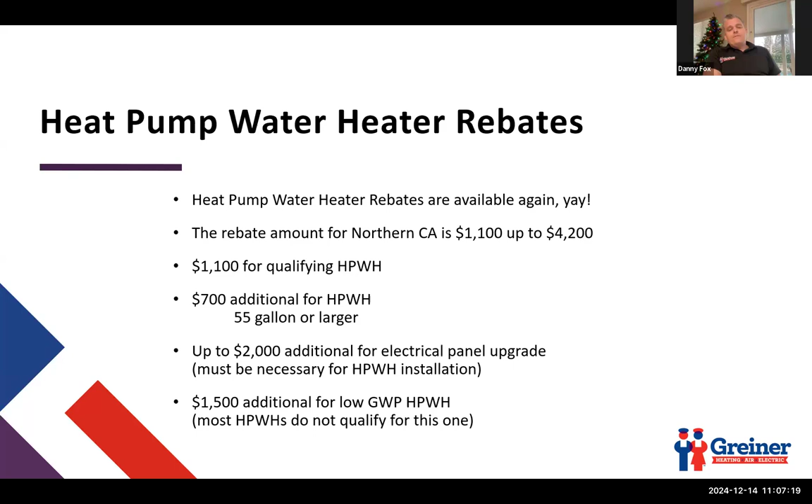So the $1,100 is for pretty much any qualifying heat pump water heater. If it's 55 gallons or larger, it adds another $700. And then you can get an additional up to $2,000 for electrical panel upgrades or electrical needs for that heat pump water heater. And then there's also a $1,500 additional rebate for low global warming potential heat pump water heaters. There's not many of those on the market now, but there are a few.

And then how do you pay for all of this? There is a really good financing program a lot of our clients are using, and most contractors are a part of, called Go Green Financing. This is subsidized by the state of California. It's implemented through local banks and credit unions - the big one around us is Travis Credit Union. The interest rates on those are between 5.49 and 10.49. The interest does vary a little bit based on your credit rating and also the term of the loan.

There is no down payment necessary for this, which is really cool. You can just get started right away without coming out of pocket. The terms are up to 15 years, capped at 1 year per $1,000 borrowed. So if it's a $10,000 project, it would only be 10 years.

There is no penalty for paying it off early. If you are using Travis Credit Union, they have a really good program where the loan can be re-amortized twice during the life of the loan. So if you're waiting for some of those rebates, you can get those rebates in, go to the bank, make a big payment, and then have a lower monthly payment.

And I just put an example up here. A $15,000 loan at 6.49% for 15 years would be $130 a month.

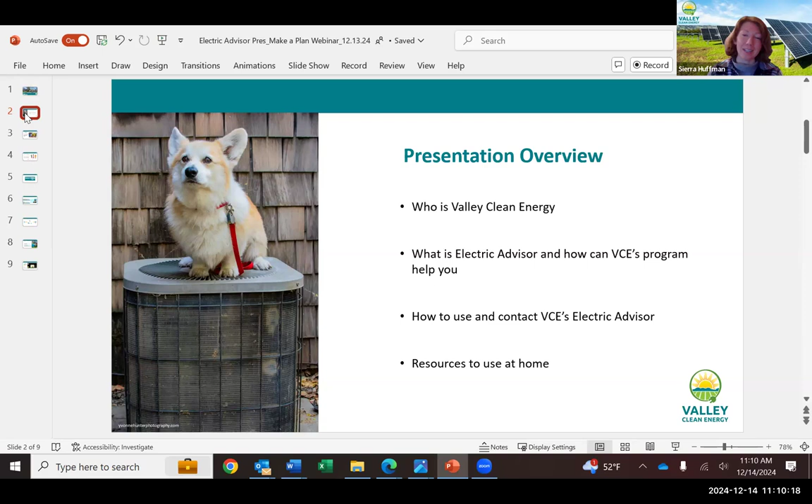All right, so who is Valley Clean Energy? Our service territory is in Yolo County. We are the official electricity provider. What we do is generate electricity, and then PG&E delivers it to you. So we meet your needs with the energy that we're producing on your behalf. And that's for Woodland, Winters, Davis, and unincorporated Yolo County.

We're a not-for-profit, so that means we're working for our customers. Any money that we make is getting reinvested back into the community. Because PG&E also services this area, you have multiple options. Our goal is to provide cleaner electricity at a lower cost in comparison to PG&E. Right now we do have a discount, but we're increasing that discount at the start of next year. It's going to be 10% for CARE, FERA, and medical baseline, and all other customers will be receiving at least a 5% discount on their electricity compared to PG&E. So we're excited about that—something to look forward to at the start of next year.

All right, so our Electric Advisor Service—if you're asking yourself that's probably why you came to this webinar today. If you're asking yourself any of these questions, like what are the benefits of electrification, the health, the safety, climate, the savings to your wallet, where do you start in your project when you're looking at your home, what current technology or options are out there, what rebates or incentives are applicable to you in your situation, how can you find a contractor and how do you compare those quotes, and what electrical infrastructure do you even have in your home—do you know how many amps your service panel uses? If you're asking yourself any of these questions, this is where VCE's Electric Advisor can help.

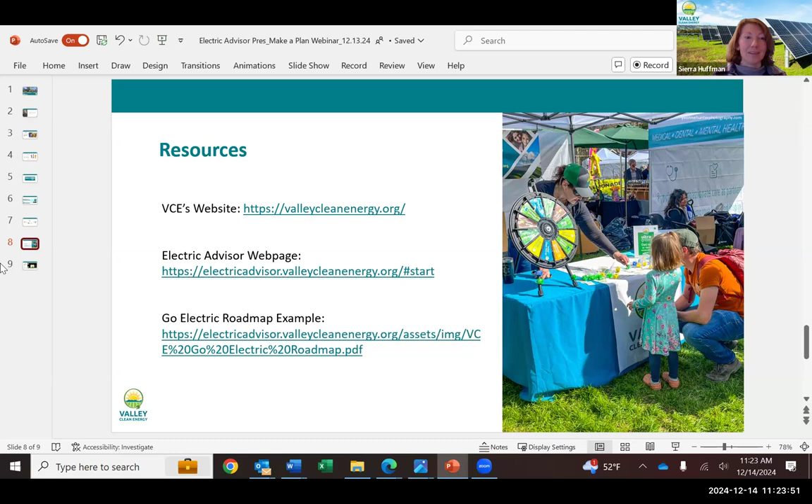We have a little time left, and some questions have been coming in. An early one came from Maria Godoy. She says, my only concern about going fully electric has to do with the resilience of the system. What do we do when there are power shortages? That's a good question, Maria.

One thing to note is that most new gas water heating and space heating appliances also require electricity, so they're subject to the same issues when the power goes out. A great way to address resiliency is to install a battery system along with rooftop solar, which can provide battery backup during a power outage. There are also new induction cooktops coming on the market soon, or that have just started entering it, that have a little battery backup to help.

Does anybody else on the panel have anything to add? I think what you said is really important to remember—most gas furnaces require electricity anyway. This comes up with heat pump water heaters too, since a lot of water heaters don't require electricity. There are small batteries you can get to back those up sometimes, but if you're looking at solar and battery, that's the best way to protect against power outages anyway.